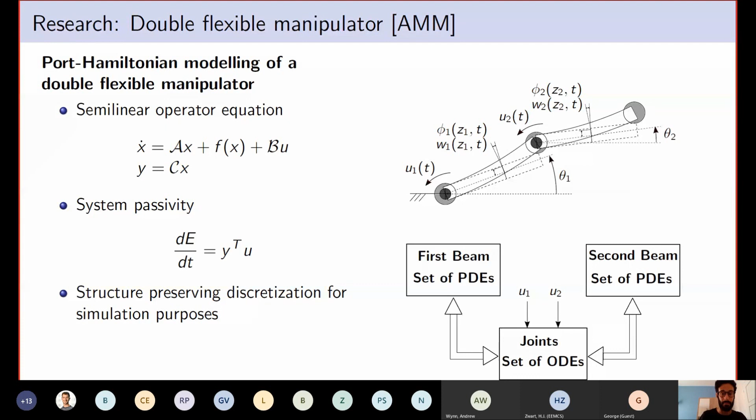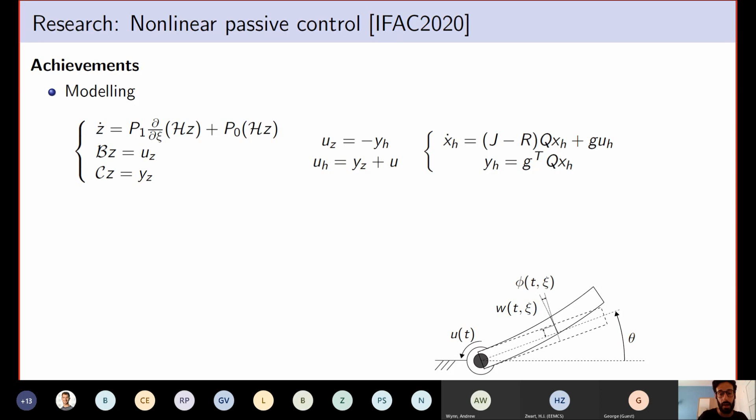Then for studying the control law for accounting of the flexible vibration, we prefer to use a simpler model, and for this purpose we use a single flexible rotating beam, of which the model can be obtained always with a power preserving interconnection of an infinite dimensional port-Hamiltonian system in 1 dimension with a finite dimensional port-Hamiltonian system that describes the dynamics of the hub on which the flexible beam is connected. So the system can be written as a linear boundary control system, where the state is defined as the composition of the flexible beam state and the rotating hub states.

For the control design, we have been inspired by the paper of Luo of 1999, where the control law is basically composed by 2 parts. The first part is a PD controller that allows to orientate the beam in the desired orientation, and the second part is composed by the product between a linear function g of z, that is a linear function of the flexible beam state, that multiplies a controller state xc.

In this case, the controller state xc is dynamic, and it's defined by basically two terms. The first term is a dissipation term, and the second term is obtained by the product between the same linear function g of z with the angular velocity of the hub on which the beam is connected. And a similar control law will be presented in the IFAC World Congress, where instead of using the original flexible beam state, we use a reconstructed beam state that is coming from a boundary observer.

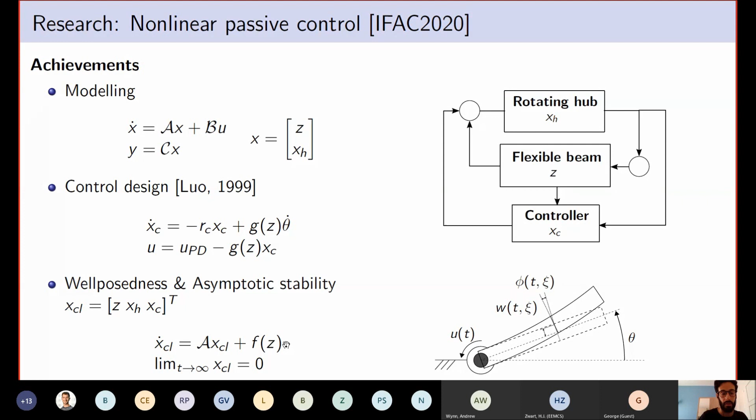So first, it is necessary to show that the operator A is the infinitesimal generator of a contraction C0 semigroup in the state space that we are considering, and the nonlinearity is square integrable along solutions. With these two ingredients, it is possible to conclude about asymptotic stability of the closed loop system.

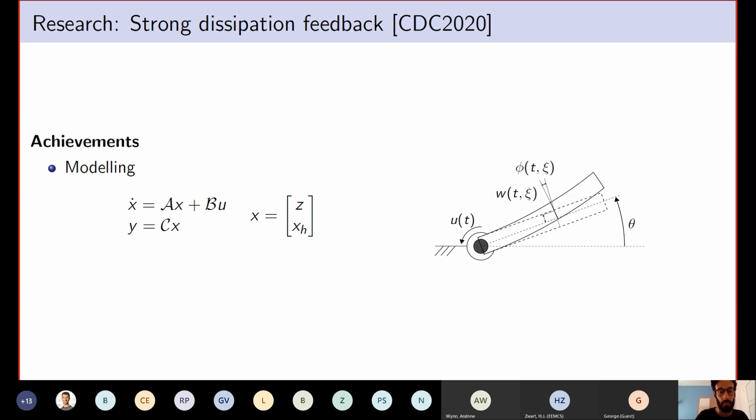The other control law that we studied always uses the linear model that I introduced before. And in this case, we take inspiration from a control law proposed by Morgül in 1999 that was proposed for a one-dimensional wave equation. So as before, the control law is composed by two parts. The first part is a proportional derivative part that, as before, is used to orientate the beam in the desired orientation. And the second part is a so-called strong dissipation feedback.

This strong dissipation feedback is defined as the time derivative of an output operator of the PDEs that describe the flexible beam. In this particular case, the boundary condition that we are using is the restoring torque that the flexible beam applies to the hub on which it is connected.

So in the control law, we take the time derivative of this boundary variable, and we apply it directly on the finite dimensional part of our system. And with an appropriate change of variables, it is possible to show that this strong dissipation feedback actually corresponds to a boundary dissipation directly on the PDEs of the flexible beams.

And it is possible to show that the closed loop equation corresponds to an autonomous linear operator equation, and that the operator A generates a contraction C0 semigroup in an appropriate weighted state space, where the inner product is defined as the sum between the original energy of the flexible beam and the weighted energy of the rotating hub in the new coordinates eta.

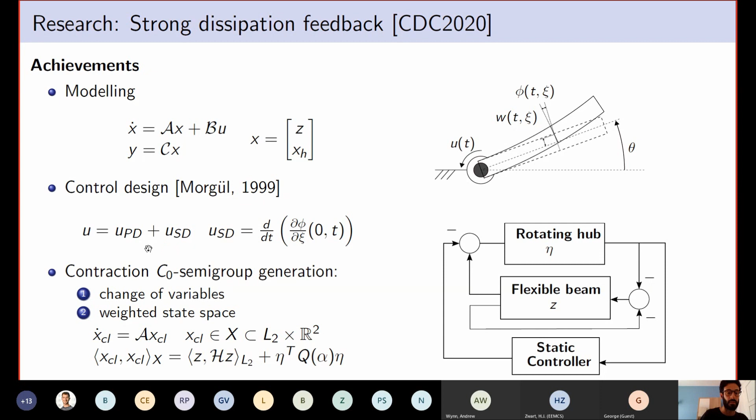And the weighting parameter alpha depends on the choice of the controller parameters of the PD part of the control law. Then it's also possible to show asymptotic stability of the closed loop system using the LaSalle invariance principle. But for that, it's necessary to add an assumption on the approximate observability of the rotating flexible beam, which in this case has been shown in the previous literature to hold.

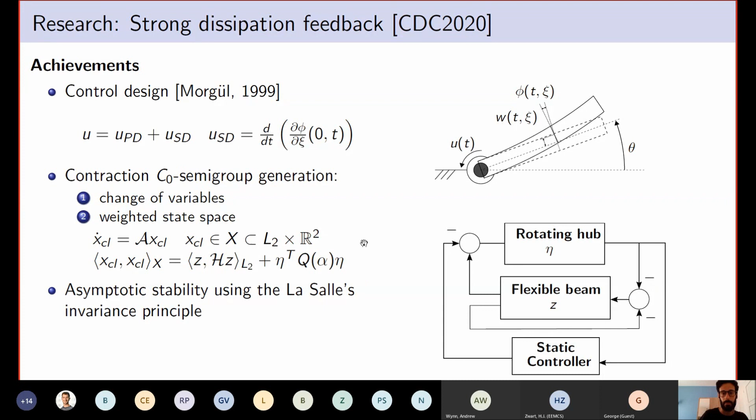Part of the ongoing work is on the extension of this control law to a general one-dimensional port-Hamiltonian system connected to a finite-dimensional port-Hamiltonian system with input on the finite-dimensional part, where we try to relax the assumption on approximate observability and use the properties of port-Hamiltonian systems to prove this assumption. This work has been submitted to the Conference on Decision and Control of this year.

The ongoing work is focusing on the impact scenario. So for studying the impact scenario, we take a model that is similar to the one that we studied before, but differently has an end effector that has an inertia, a mass, and it is the end effector that enters in contact with the external object.

The external object is modeled with a soft impact model that is composed of a linear spring and a nonlinear damper. The damper is taken to be nonlinear, taking inspiration from previous literature in the same field, and the nonlinearity of the damper helps to conclude about well-posedness of the system. This is because this nonlinearity, which depends on the deformation of the object we are entering in contact with, allows us to have a friction force that is continuous in time.

For example, try to think about a linear damper that doesn't depend on the deformation. We will have that in the instant before contact, the friction force is equal to 0, but in the instant in which we have contact, the force will be different from 0. This continuity is given by making it depend on the deformation of the object we are entering in contact with.

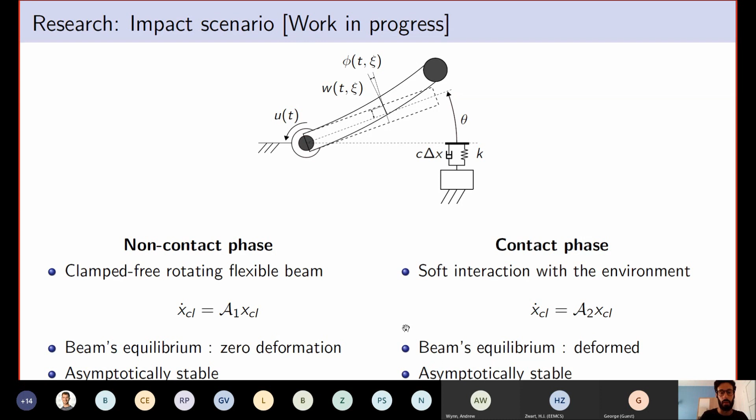So these two equations are basically different, and the principal difference, which can be seen also from a practical point of view, is that the beam's equilibrium in the non-contact phase is at 0 deformation, but the beam's equilibrium in the contact phase is in a deformed configuration. It is possible to show that both systems are asymptotically stable.

But the challenges that we have in this case are that first we have to show well-posedness of the overall system, in the sense that the solution exists, is unique and depends continuously on the initial condition. This is helped by the fact that the nonlinearity is applied to the end effector, which is part of the finite dimensional equations of the overall system, so the nonlinearity doesn't act directly on the boundaries of the PDEs, and also by the fact that it's possible to show that the nonlinearity is Lipschitz continuous.

Then another challenge is simple stability in the sense of Lyapunov, and the idea is to extend to the infinite dimensional case the Lyapunov stability theory proposed by Branicky in 1998. This theory basically allows having different Lyapunov functions depending on the active phase the system is in at a certain moment. It also asks that every Lyapunov function is non-increasing along the system solution, and it also asks the so-called switching condition.

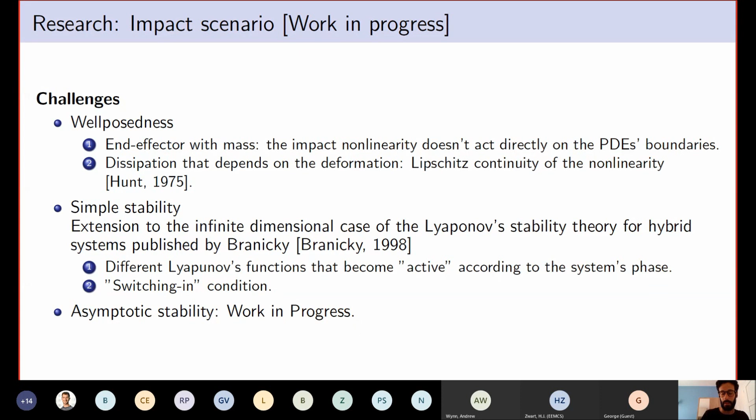Basically, the switching condition asks that the activation value of each Lyapunov function is lower than or equal to the previous activation value of the same Lyapunov function. These three conditions are proven to be true for the system under study. Then asymptotic stability is still a work in progress topic that we will investigate in the next months.

So here I have the list of publications. The first one is about the model of the double flexible manipulator. The second one is a publication that I didn't present in this presentation: modeling and control of an IPMC actuated flexible structure, a lumped port-Hamiltonian approach. We basically use the port-Hamiltonian approach to control a flexible structure that is actuated by electroactive polymers.

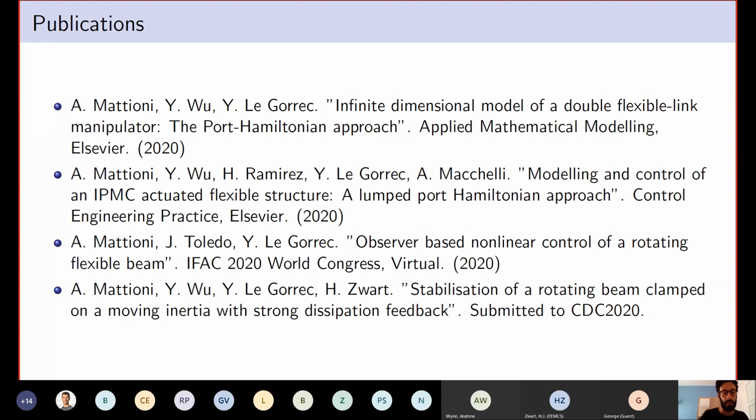Then the third publication is the observer-based nonlinear control of a rotating flexible beam that will be presented at the virtual IFAC World Congress. And the last one is the stabilization of the rotating beam clamped on a moving inertia with strong dissipation feedback, which has been submitted to the Conference on Decision and Control.